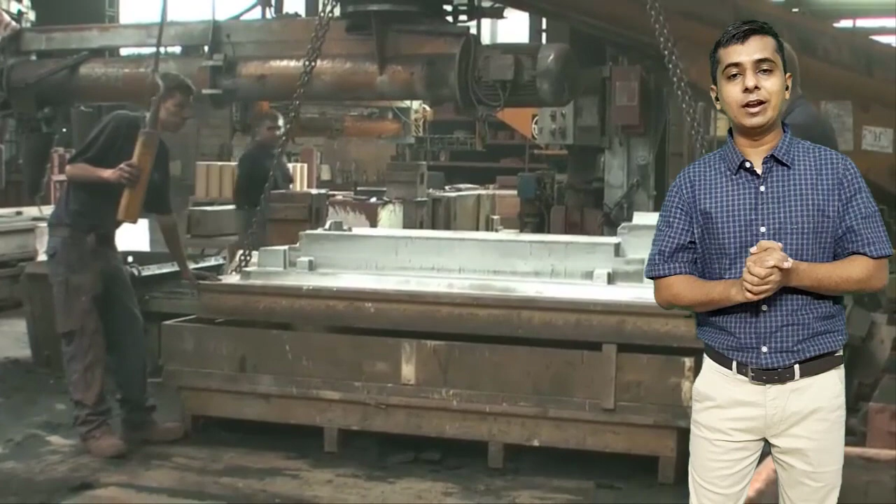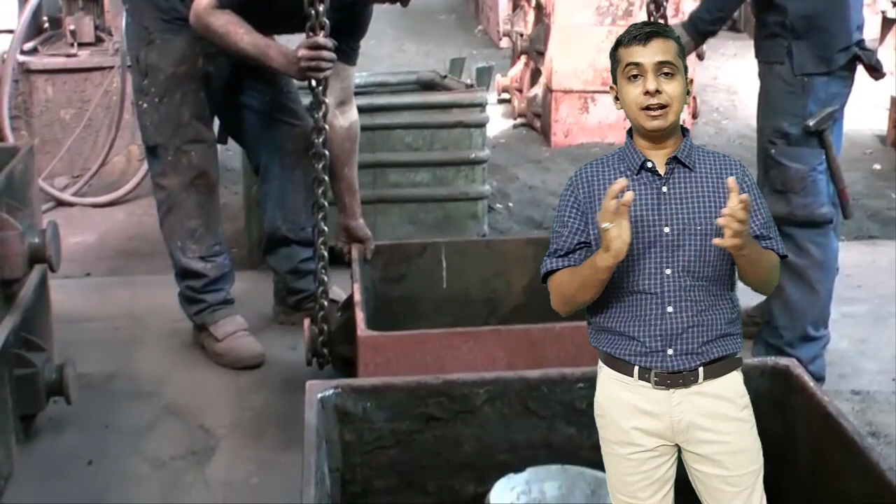I welcome you all to a course of Metal Casting Technology, ME373, offered as an elective course to 5th sem students of Mechanical Engineering of CHARUSAT. My dear students, earlier in 3rd sem, you already went through a course of manufacturing process where you learned about the basics of casting process as well as various variants of the traditional sand casting process.

Here in the present course we are going to explore the metal casting process in a broader way. The main objective of the course Metal Casting Technology is to understand the science, engineering and technological perspective of the metal casting process. So in science we have to learn about the various physics involved during the metal casting process.

As you all know, casting is a process where liquid molten metal is poured into a mold of a desired shape and allowed to cool or solidify, and that solidified piece is known as a casting. During the process, the molten metal flows within a cavity with different velocities and different turbulence. This is all about the molten metal flow behavior during casting. So we have to study the physics involved during the filling of the cavity with the molten metal.

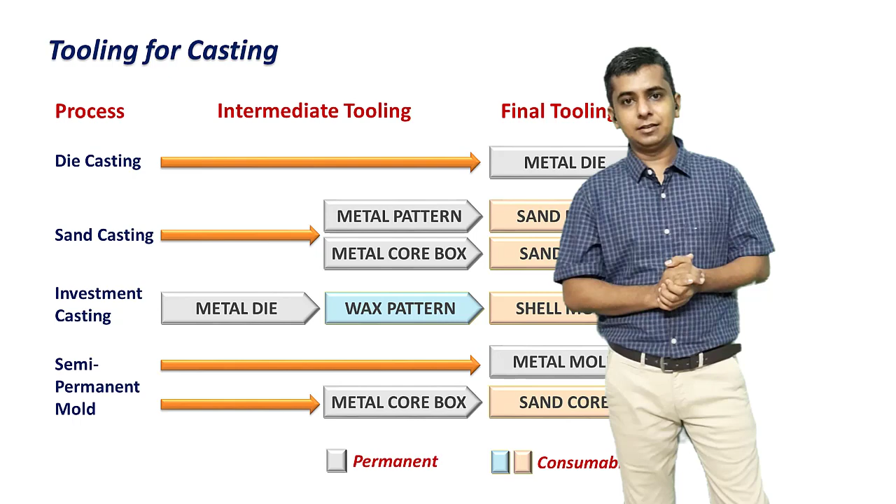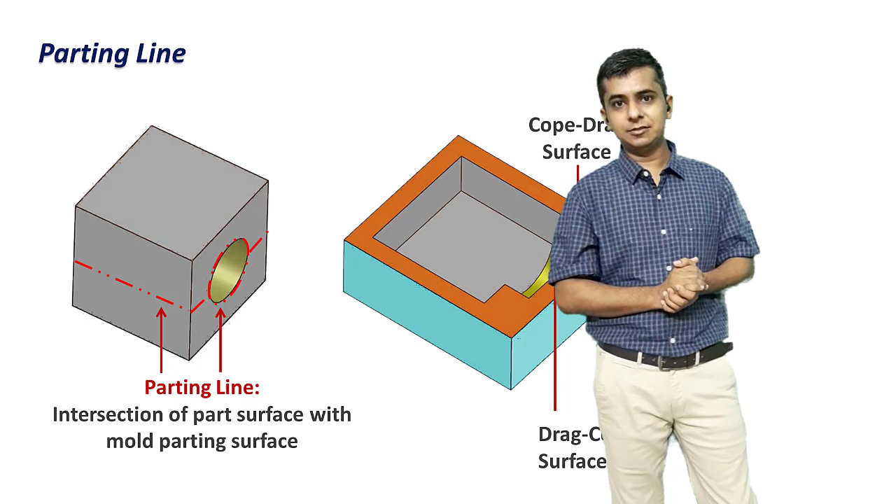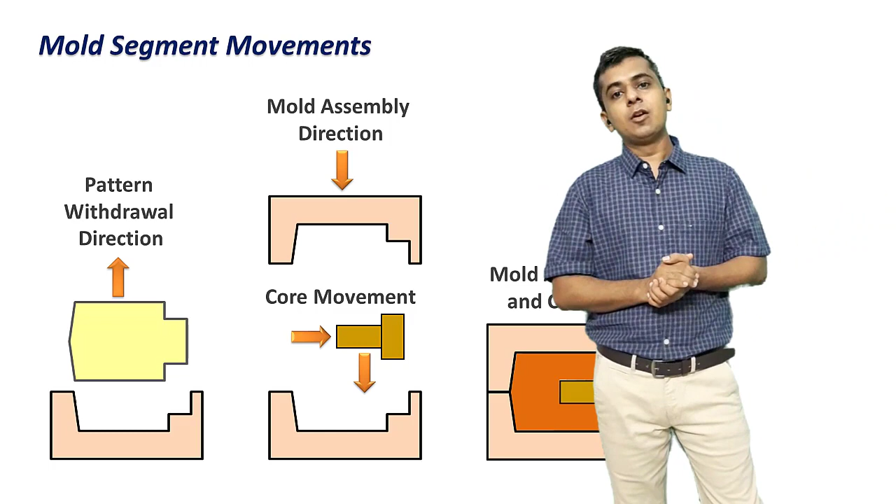So in tooling design you have to take care of the orientation of the part, where you have to put your parting line, how the core will be placed at the required places, what will be the dimensions of the core print, and what different allowances need to be provided on the pattern. So that is all about tooling design.

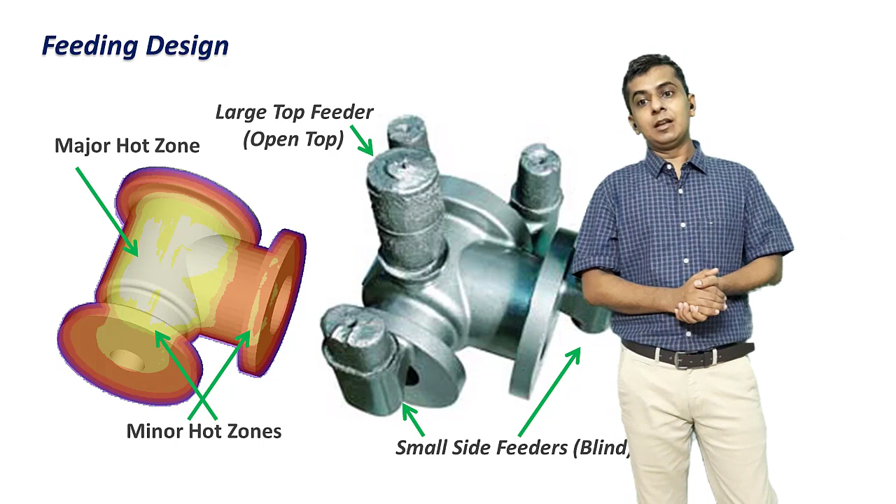And the next is feeding design for a perfect casting. How to eliminate shrinkage formation by application of feeders? Where to put feeders in a casting? With which dimensions do you have to put feeders? What number of feeders are required and what distance between two feeders is required to minimize shrinkage formation? And to improve the yield of casting, what different feedaids can help eliminate shrinkage as well as achieve progressive directional solidification to improve the overall yield?

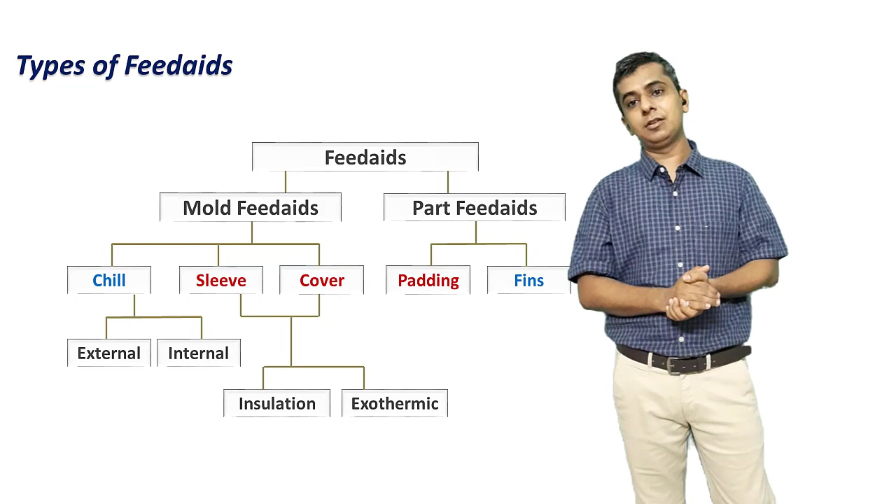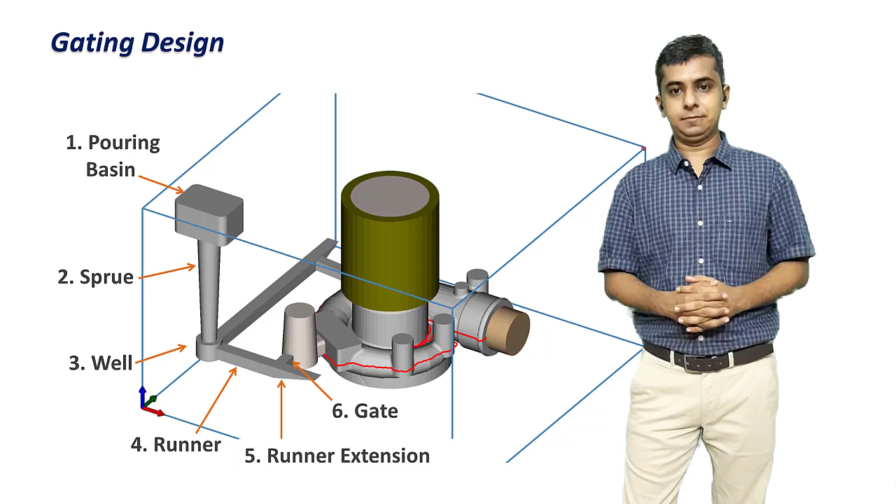The next one is gating design, where we have to decide the position of various elements of the gating system: where to put the pouring cup, what height to select for the pouring cup or sprue, what will be the channels of the runner system, and how many ingates we have to use for proper filling of the entire cavity. So this is all about gating design. These are the efforts we have to put in as engineers to produce a good quality casting.

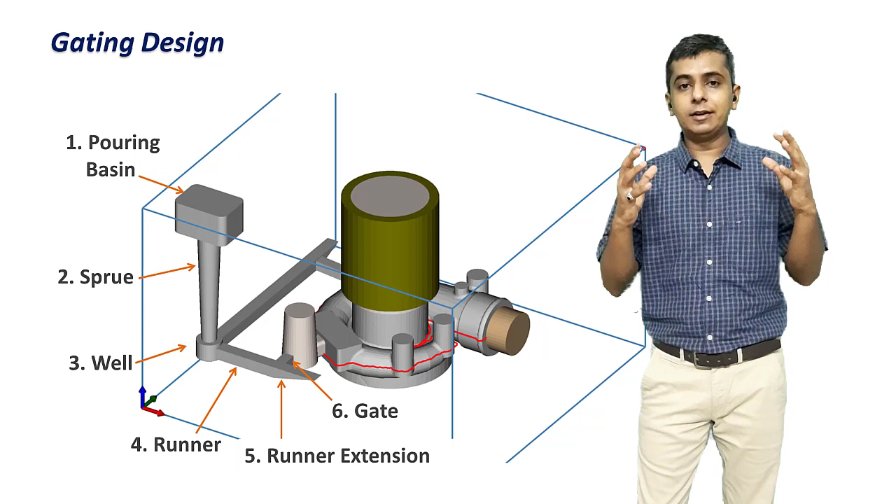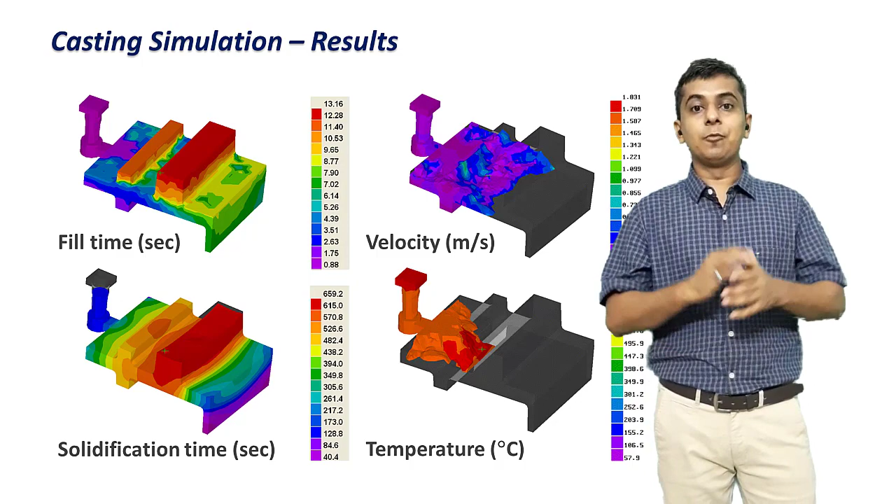The third one is metal casting from the technological perspective. The major challenge of the casting process is that you only know about the defect at the end of the process, when you knock out the mold, remove the casting and inspect it. So with the help of computer aided design and simulation software, we can predict the results of the final casting without doing rigorous experimentation.

At the end of the session, I would like to share a vision of our former president, Dr. APJ Abdul Kalam: by 2020, India will be a leading producer of castings and a large exporter of these items. Along with this, we now have some more initiatives of our present government of Shri Narendra Modi ji, that are Make in India, Skill India and Atmanirbhar Bharat.

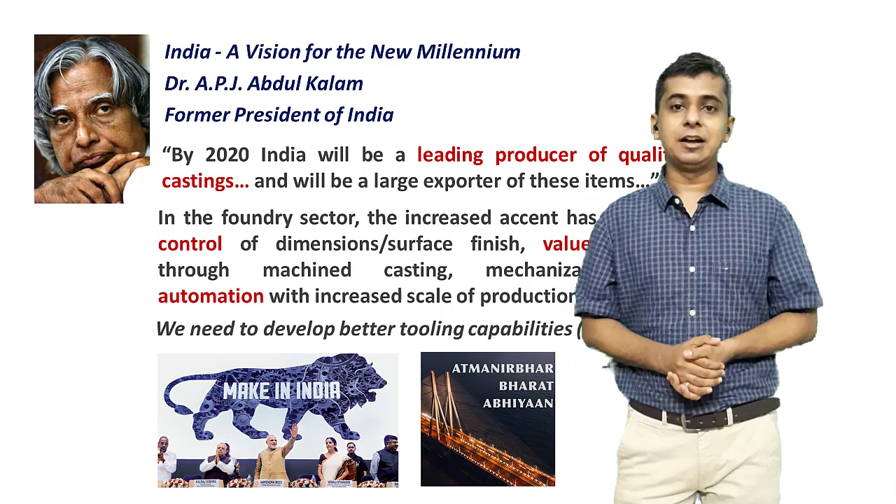So to achieve this vision, we need to develop better capabilities in tooling using CAD. We need to develop mechanization and automation practices in our foundries for large scale production. And for that, the nation needs skilled engineers like you.